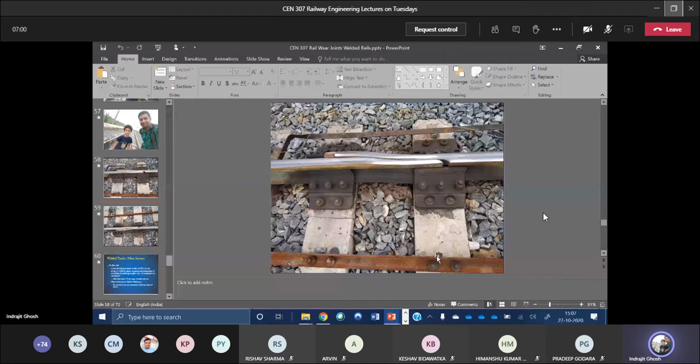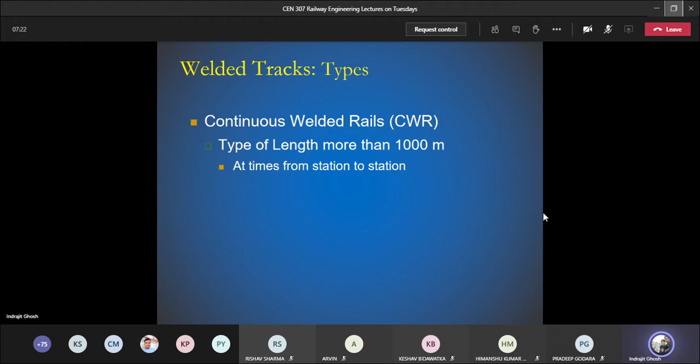Then we saw something known as long welded rails. In case of Indian Railway, long welded rail ranges greater than 250 meters in case of broad gauge and 500 meters in case of meter gauge. And we saw something known as continuous welded rail, where the length of the rail is more than 1 kilometer, sometimes extending from one station to another.

Then we saw some specific scientific terms related to long welded rail. If you look at the whole stretch of the long welded rails, at the end portion we have something known as breathing length. Breathing length is the portion where the rail extends or contracts.

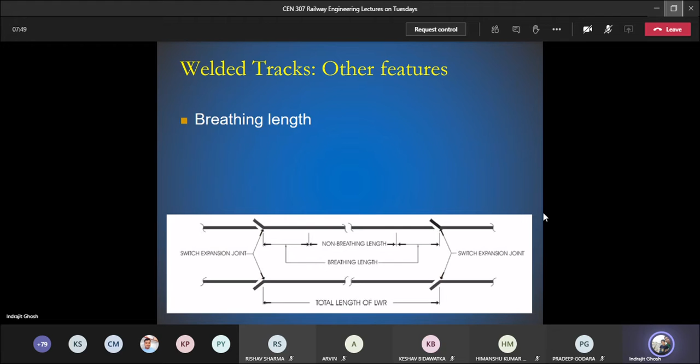There is some portion in the middle, shown here, known as non-breathing length. The manufacturing or rolling process is such that there will not be any contraction or expansion in the middle portion. This is the non-breathing length, and the portions at the sides, which I marked here, are the breathing length. Here we have something equivalent to the joint.

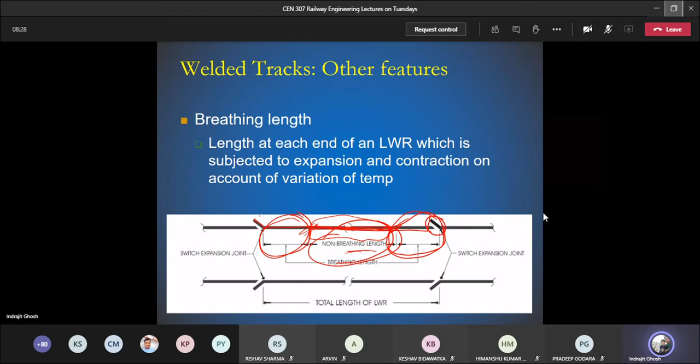We call them switch expansion joints. We have seen some photos. Here is one rail, here is another rail, with some special kind of mechanism. Here is a gap, here is another gap, and you can see this rail does not have the same cross section as earlier, and here also we do not have the same cross section.

I have shown you some photos from a railway track I visited with my son, showing some kind of special fastening systems. These are close-up photos. Here you can see we have kept a gap for the expansion and contraction of this particular portion.

Similarly, we have space on the other side. So the length of the long welded rail for this particular rail goes up to this point, and for this rail, it goes up to this point. There are nuts and bolts here.

There are some different kinds of devices that we have used here. This is a concrete sleeper; the photo I showed earlier was a wooden sleeper. As you can see, there are gaps for expansion and contraction, since we expect the rails will be expanding or contracting.

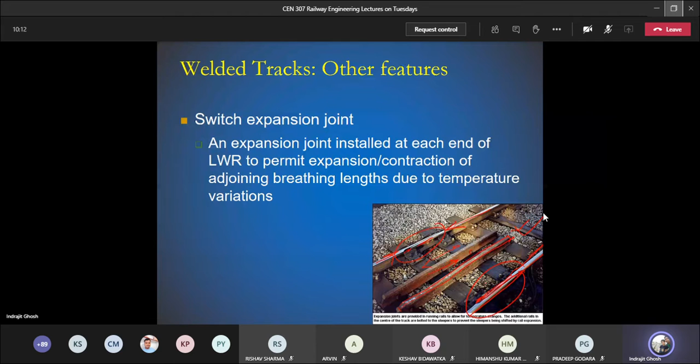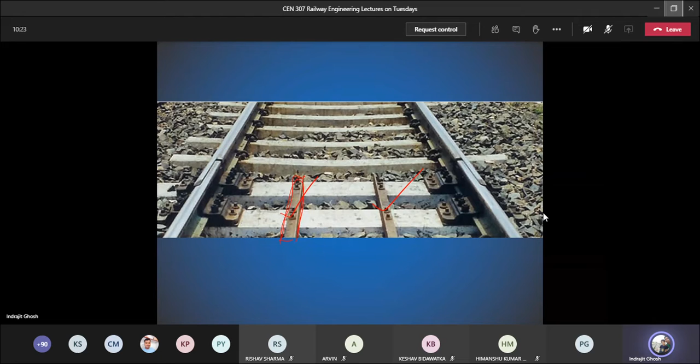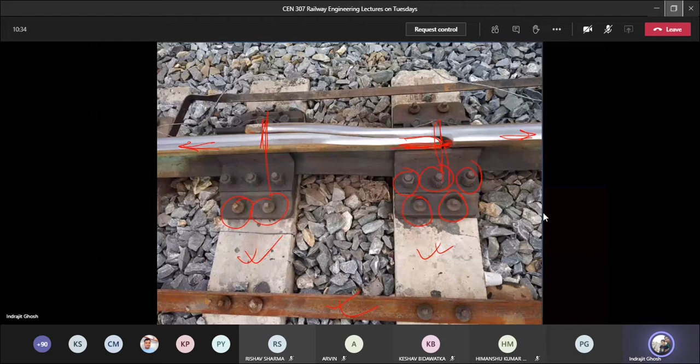So in order to have more stability of the sleeper, so it does not move along with the rail, we use some shorter rails to fix the sleeper with certain devices to maintain stability. Here also you can see we do not have rail but some kind of metal component fixing the sleeper for more stability. Here it is not rail but a metal part which has been fixed. Here also the same thing - this is the other side of the fastening.

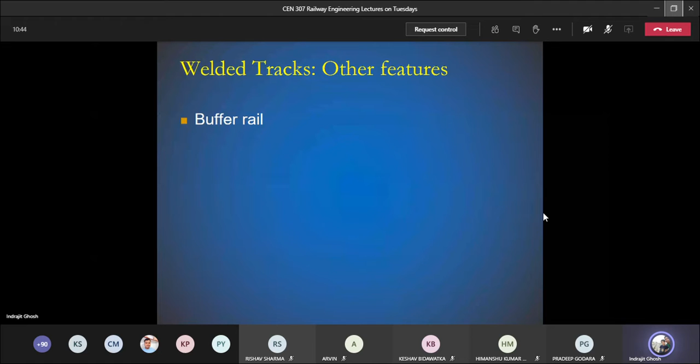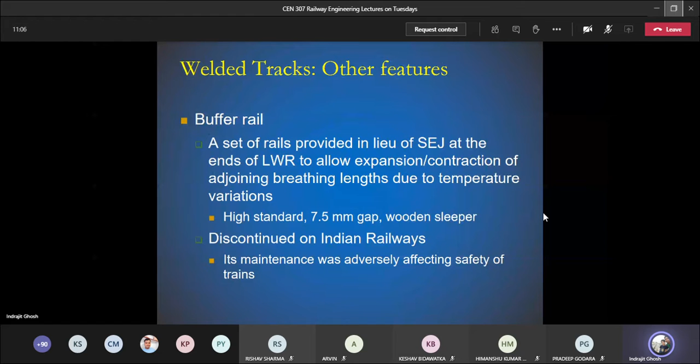Then we also talked about something known as buffer rail. These are special kinds of rails we have seen earlier, but nowadays we do not use them. The main issue is maintenance. When we replaced the traditional joint with buffer rails, we saw that the maintenance cost did not reduce significantly, so this is discontinued for Indian Railway tracks.

We also talked about the locations where we should not use long welded rail, such as new construction or where a line is being doubled, because earlier there was a single line.

So we do not use long welded rail until and unless there is mechanical compaction of the earthwork. The reason is that when you go for manual compaction, over time there will be some sort of sinking. And you can understand when you have a 250-meter long rail and some portion of the land is sinking, there will be a problem. There will be problems in the alignment and in the cross level. So until and unless we go for mechanical compaction of the earth, we do not recommend installation of the long welded rail. So approval of the chief engineer is required.

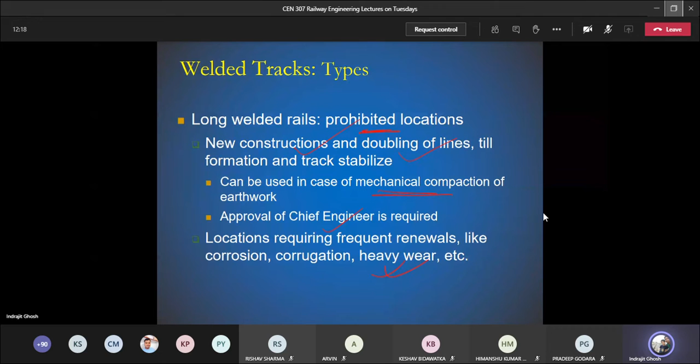Then there are some other special locations where we should not install long welded rail: yielding surfaces, soil susceptible to pumping, heavy contamination of the ballast where you have to replace the ballast and do the screening. We do not go for long welded rail there. You have to remember that long welded rail has substantial length. It is not that you have one single rail length of 12 to 13 meters that you simply remove, then remove the sleeper, clean the ballast and put the rail back. No, it is not that easy with long welded rail. More than 200 meters, approximately 250 meters, less than 1 kilometer, it is very tough to do.

So we do not recommend installation of long welded rail at certain locations, and where we have frequent floods, subsidence, or sinking of land, there also we do not go for long welded rails.

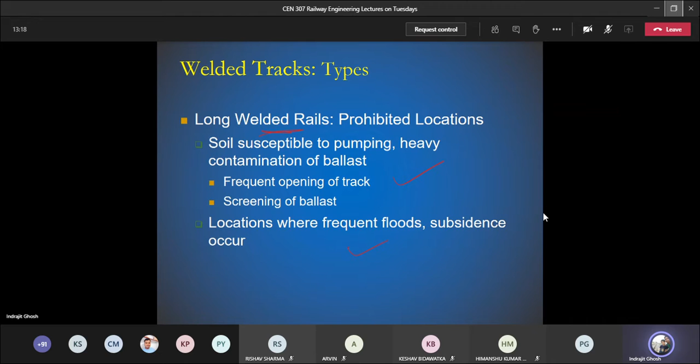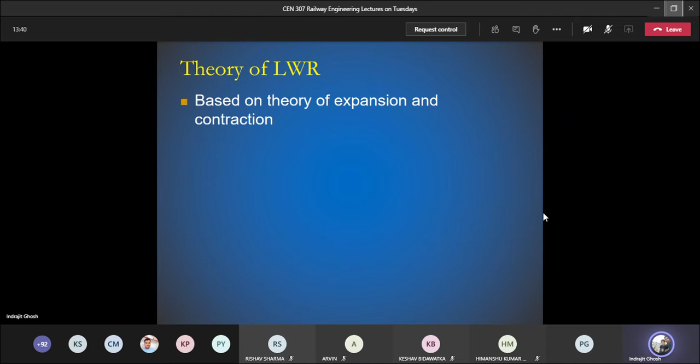Now there is one numerical that we have to solve, related to the theory of LWR, long welded rails. This is based upon the theory of expansion and contraction. We have seen that the switch expansion joint is set up so that there is provision for the rail getting elongated or contracted. So the expansion we observe in a track member, the rail, is a function of different parameters. One is the coefficient of linear expansion of the rail material, the material used to roll the rail. The second is the length of rail. And the third is the temperature variation, the range of temperature a particular railway section is exposed to.

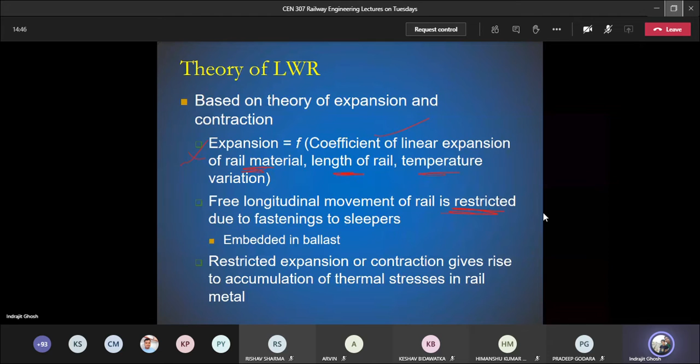Now, when we are using a switch expansion joint, we use nuts and bolts or other devices to fix the rail to the sleeper. We even put some sort of metal bar in the middle so that the sleepers do not move and the alignment is maintained. Obviously, we are restricting the movement of the rail, and the whole track is embedded in the ballast. It has been observed that this restriction imposed on the rail gives rise to some stresses. That stress is thermal stress, because everything is happening due to temperature variation, which could be due to the temperature at the site, or even due to dynamic loading.

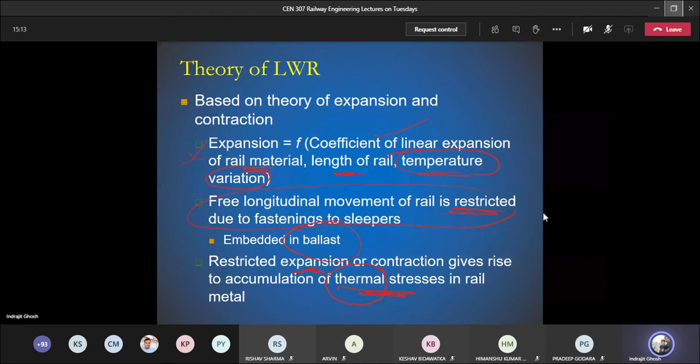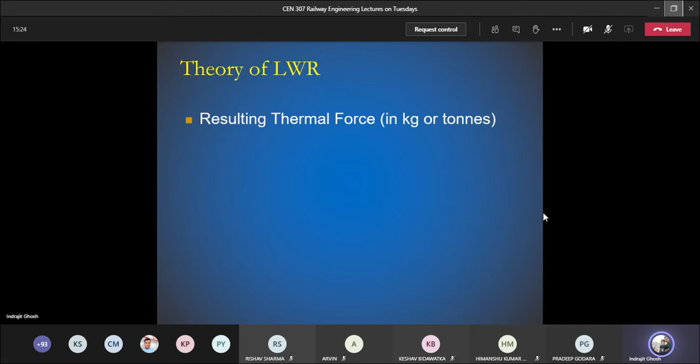So stresses will be developed. What kind of stresses? Thermal stresses. So there will be thermal forces, which we represent in kg or tons. There is a small formula where P stands for the thermal force, and there is alpha, T, E and A. Alpha is the coefficient of thermal expansion, which is a material property. T is the temperature rise above the rail laying temperature. A is the cross-sectional area of the rail section. For a 52 kg rail, as one example, the cross-sectional area is 66.15 square centimeters. For 60 kg rail, 90 R, 75 R, 50 R rail, the cross-section will change. It is not uniform across all rail sections.

Then one more property included in the formula is the elastic modulus, or modulus of elasticity, of the rail steel. So this is a property of the rail steel, this is the rail section, so everywhere we are talking about rails. And lastly, there is one more formula, 31.5 ST. S is the sectional weight in kg per meter, like 52 kg per meter or 60 kg per meter, or for the problem you solved related to 90 R, you will be able to tell how many kg per meter.

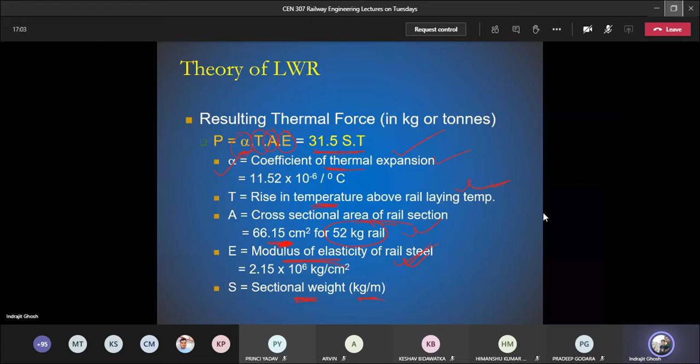So this is the formula. So we will solve a problem. There is one more small equation that you people have to remember, which is cumulative value of expansion and contraction. So what is the amount of expansion or contraction that we will be expecting at a particular location?

Now, whenever we are saying a location, obviously we are talking about LWR, and you know the middle portion of the LWR or the non-breathing length of the LWR does not expand or contract. So only it is related to the breathing length. So that's why it is written that cumulative value of expansion and contraction at the breathing length. Here L is the length of breathing length, and alpha T we have seen in the previous slide. So alpha is coefficient of thermal expansion, which is property of the rail, and T is the temperature variation.

Okay, in case of broad gauge on Indian Railway, breathing length is taken 100 meter on one side of the BG track. So 100 meter on one side, 100 meter on the other side. In the middle there will be some portion where it is not expanding or contracting, non-breathing length. So based upon your understanding so far, you have seen that when I have shown a slide on LWR, I said length of LWR is minimum of 250 meter.

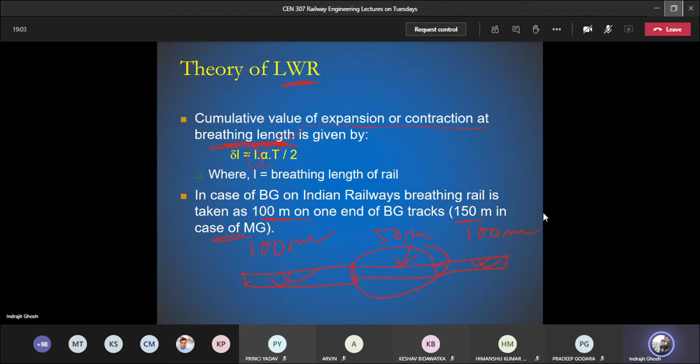Okay, now when I say breathing length is 100 meter on each end, so 100 meter, minimum 50 meter in the middle. Okay. So breathing length, non-breathing length. This is one long welded rail section. Okay. In case of meter gauge, it is 150 meter on each side. So 150 meter on the extreme right, 150 meter on the left hand side. In the middle, you have non-breathing length.

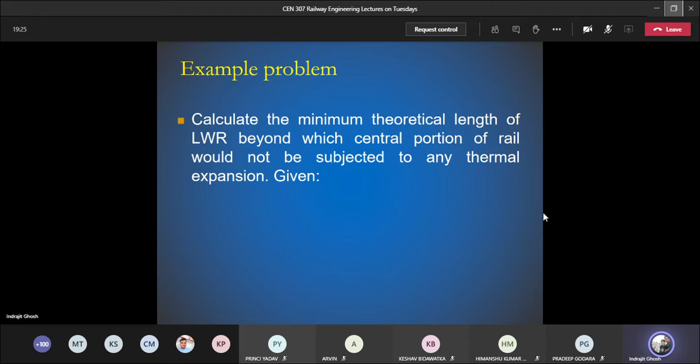Example problem. Calculate the minimum theoretical length of LWR beyond which central portion of the rail would not be subjected to any thermal expansion. So minimum theoretical length, and then we have been given certain data. So it says coefficient of thermal expansion, variation in temperature, cross-sectional area, modulus of elasticity. Then it talks about something which is sleeper spacing. You people know what does it mean by sleeper spacing.

Sleeper spacing is represented either M plus x or xxxx per kilometer. Okay, when we had nuts and bolt kind of fittings, this was more popular. So M plus x means how many sleepers within one rail length. So 12 meter or 13 meter, how many within that rail length. And this one is 1660, 1680 sleepers per kilometer.

Okay, there is one more data which is given here. Average restraining force per sleeper per rail is 300 kg. So what is the force being exerted by the sleeper on the rail? Because we have fixed some kind of devices. Okay, so that's why there are stresses getting generated. So we know how to calculate the thermal force that will be generated because of this restriction imposed on the rail. So how to calculate it? Okay. So from the formula we have seen that it is P.

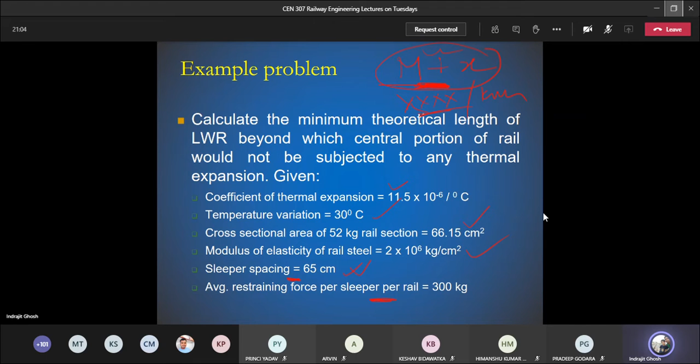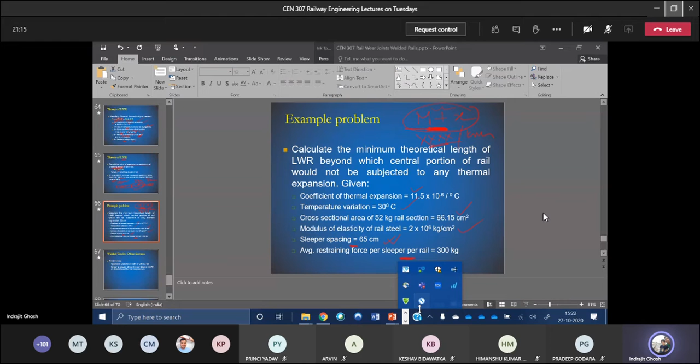So let me solve this. So all of you please solve it. Hopefully the whiteboard will come. Oh, how do I clean this?

How do I write? Okay, P is equal to, so we have seen a formula, alpha E A T. Okay, alpha value is given. Alpha is basically coefficient of thermal expansion or contraction, 11.5 multiplied by 10 to the power minus 6. This is alpha. E. E is given as modulus of elasticity, right? 2 into 10 to the power 6. You have to be careful about the units. Yeah.

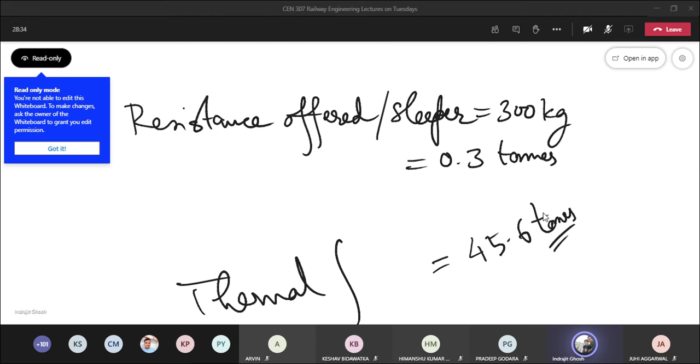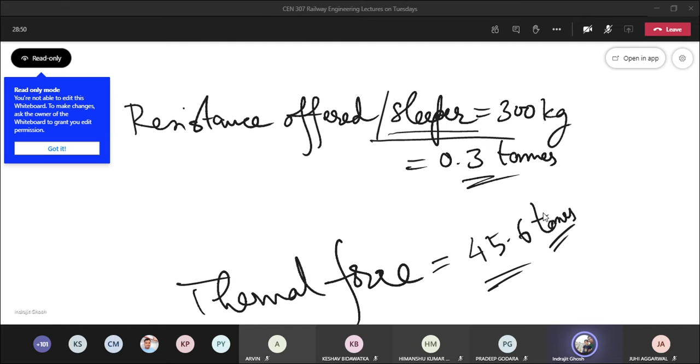This is the thermal force, which is 45.6 ton. This is resistance being offered per sleeper, which is 0.3 ton. So now we need to see what is the number of sleepers we required to restrain a force.

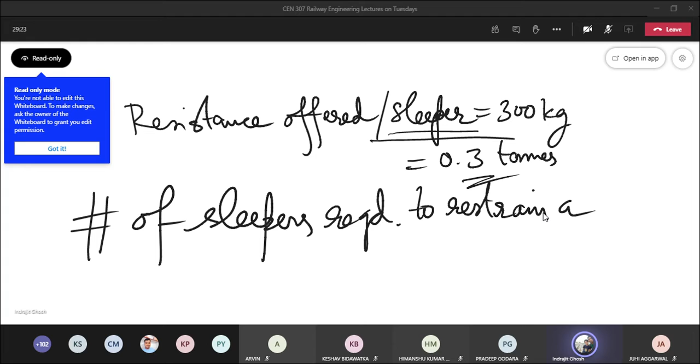How we will be getting it? We know it is 45.6 ton, which is being generated. This will give you the number of sleepers that we need. So as per my calculation, it is 152 sleepers.

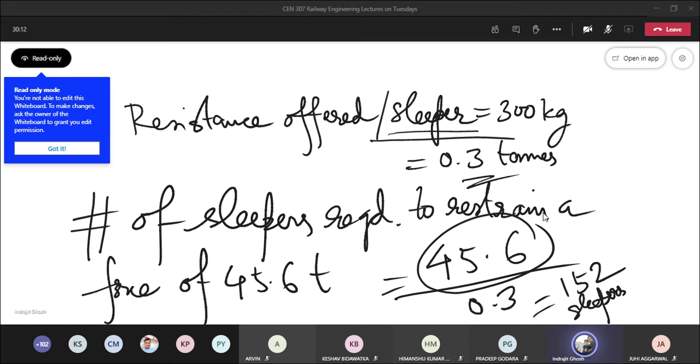This 152 sleepers, you have to remember that we are talking about breathing length. So when we say that at one end of the breathing length, at one end of the LWR, this much force is getting generated. This is the restraint that can be provided by one sleeper. This 152 sleepers is how many sleepers we need at each end of the LWR, or how many sleepers we need at one breathing length. Okay, in this case, this is 152.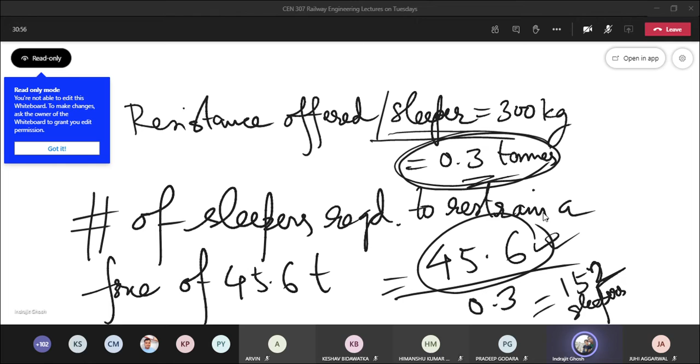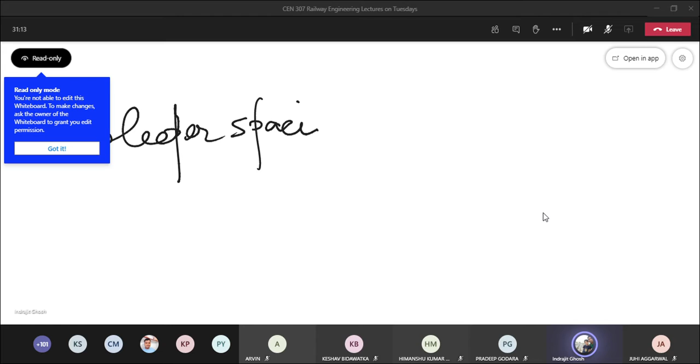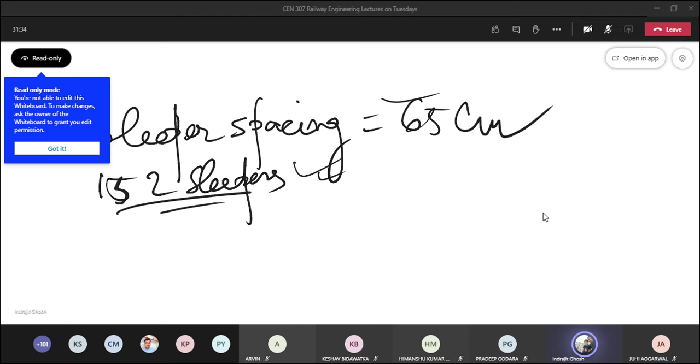So if breathing length is 152 sleepers and we know the sleeper spacing, sleeper spacing is given as 65 centimeter. How many sleepers we need? We understood it is 152 sleepers. So from these two, we get an idea of how much length we require to lay 152 sleepers, because we know the distance between two consecutive sleepers. So how much it is?

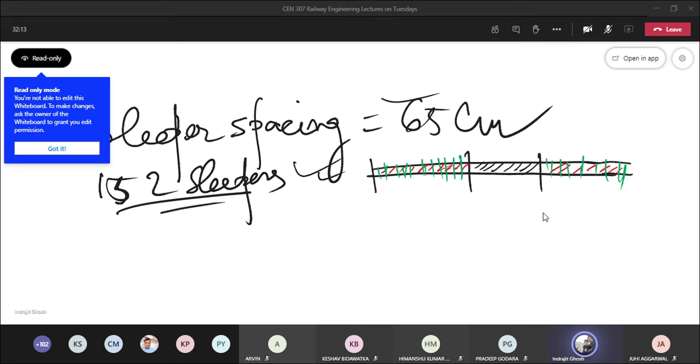So this is a long welded rail. We have non-breathing length. We have breathing length on this side and on the other side. We know 152 sleepers. We know the sleeper spacing. So if we know the sleeper spacing, we will be able to tell what is this length, the breathing length. Okay. So what is the breathing length? Anybody?

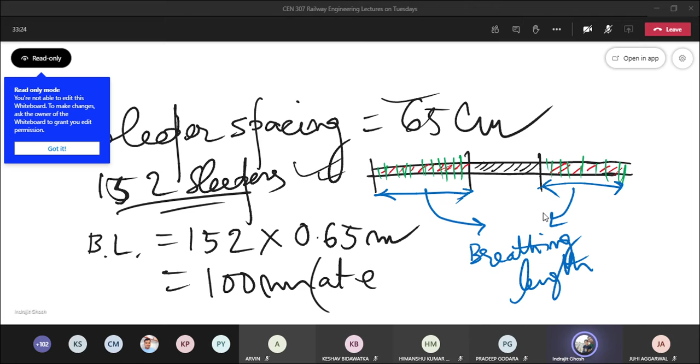Approximately. So shouldn't it be 151? Yes, ideally it should be, but try to see this photo. Just hold on. Yes, now, whether we are including this sleeper or not, right? So you are saying that if there are 3 sleepers, there are spacings for 2, right, Keerat? Yes, sir. So 152 sleepers means 151 spacings. Yeah.

So how much it is coming as per your calculation? I haven't multiplied it. I'll just do that. So it's 98.15 meters. With 151? Yes, sir. Okay. Yes, that is correct.

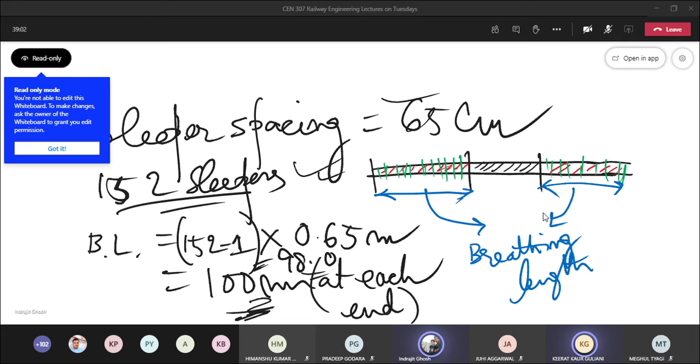Yes, sir. There is a term called destressing. So many a times we say that we are distressed. So that particular spelling is different. That is distress, D-I-S-T-R-E-S-S. But here you can see this is relieving the stresses that are getting generated in long welded rail or continuously welded rail. Okay. So destressing is done by doing something. What is that? This is not shown in this particular slide. Any idea how we'll be able to do it?

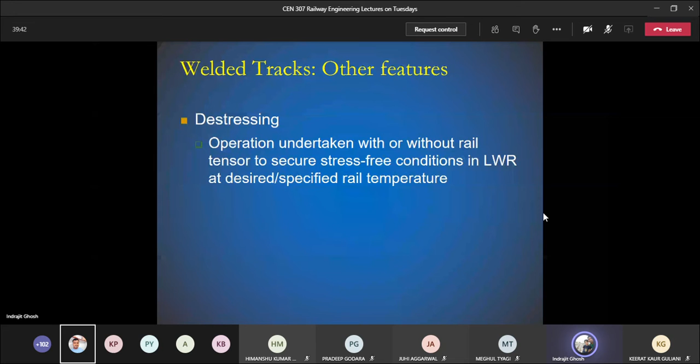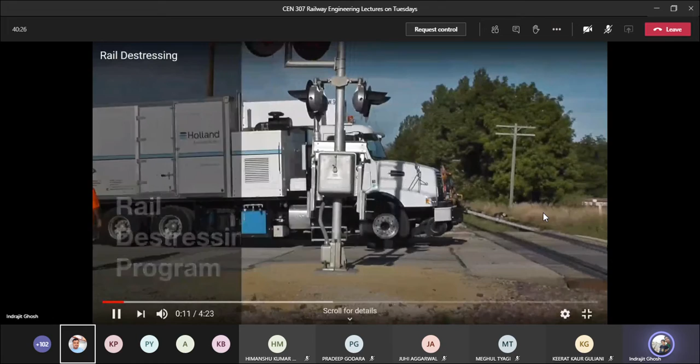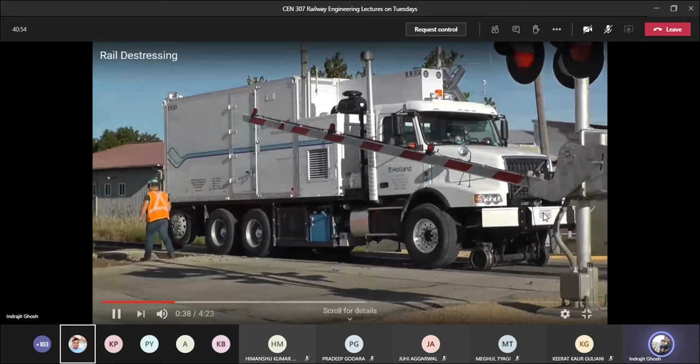Let us see a small video. You people can see my YouTube screen? Yes, sir. Okay. So heading: rail destressing. So they have a special truck. Now see how the truck is moving along the railway track. See here, some kind of setup which is similar to rail wheels.

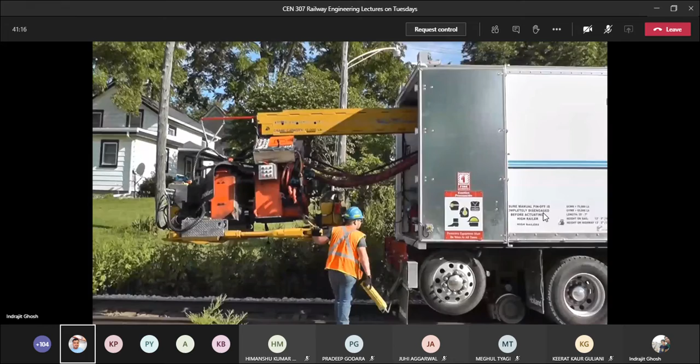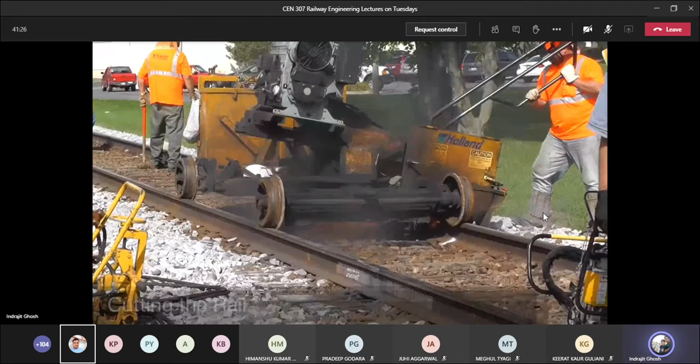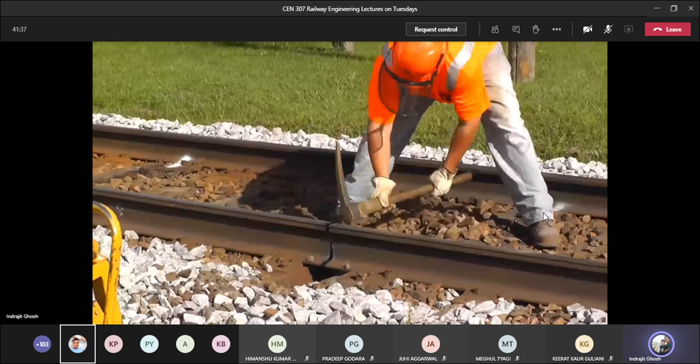What they are doing, they're simply cutting it. They're cutting the rail. Then once they cut the rail, what will they be doing? Finally, it is not shown here. What will they be doing, any guess? Welding. Welding, correct.

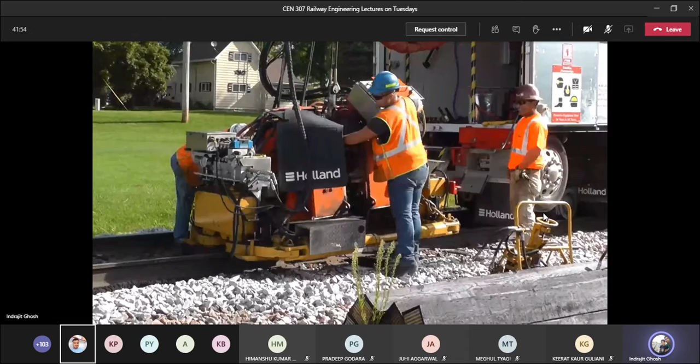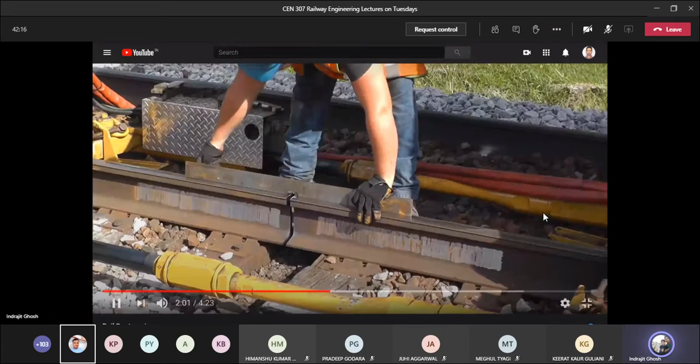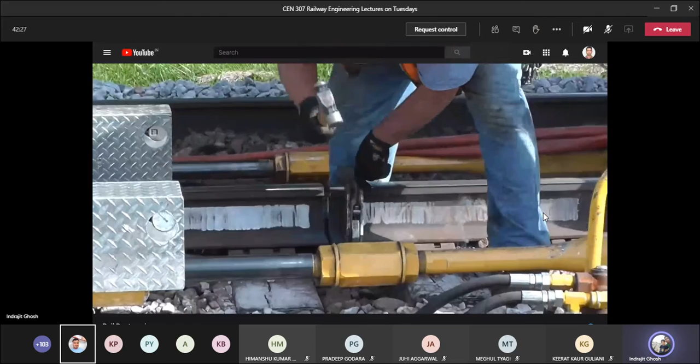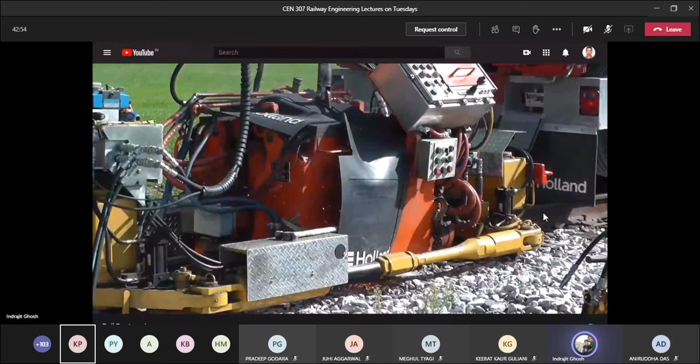See this device here. This is a hydraulically operated machine. So this is the mold that they use for the welding. Which welding method are they using? When they have a mold, they will put some powder. Thermite. Which is thermite. What are the powders? Ferric oxide and aluminium. Yes, then after the reaction, Fe will come out, Al2O3 will be remaining, and there will be a huge temperature rise.

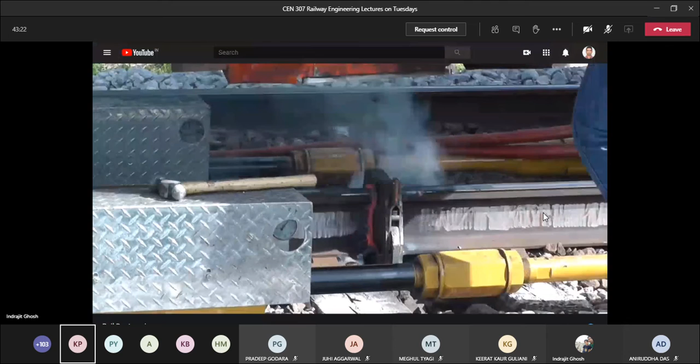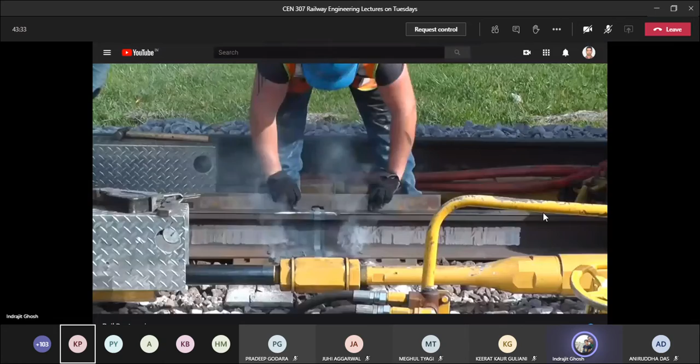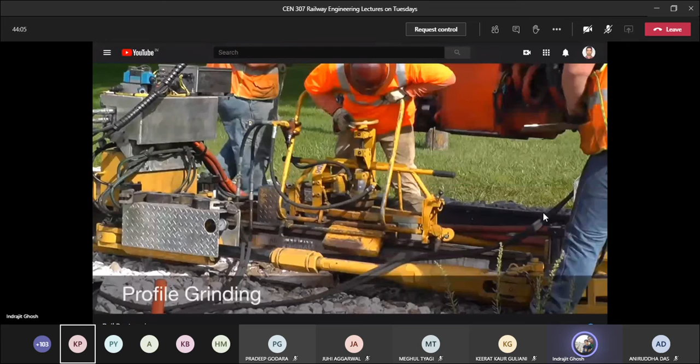They need to fix the cross level as well as the alignment. So rail anchor we have seen during the discussion of creeping. Smoothening of the rail surface. There is foreign metal, so we need to do some polishing.

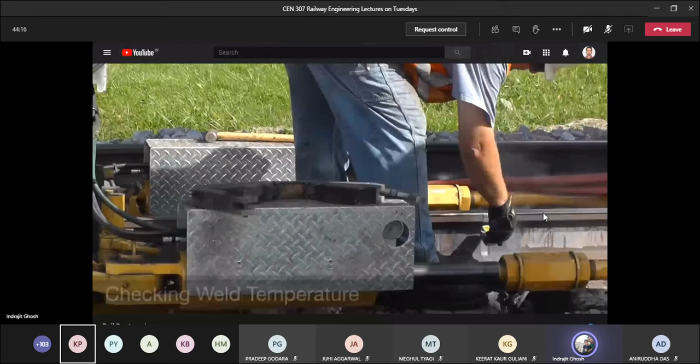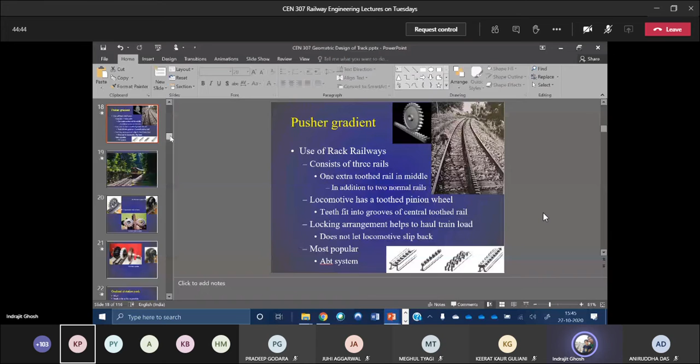Okay, so I have included the video link at the bottom portion of the slide, so people can see it later. Okay, so this is the end of the welded rail. Now I thought that I would be discussing fastening, but I saw that there are so many things to remember. I have postponed the discussion of fastening. Okay, and I will directly go to the geometric design component as you people are working on the course project.

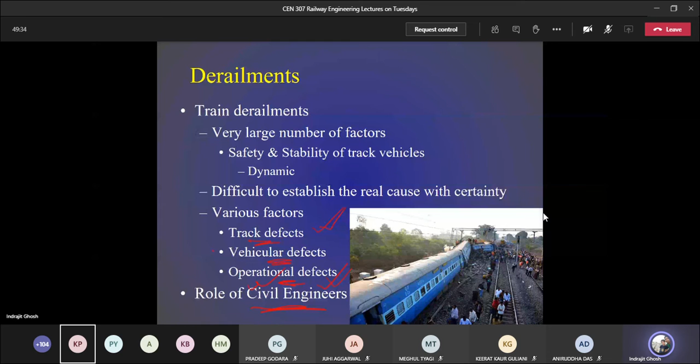Now when we say civil engineer, I know that this is the era of multidisciplinary things, so we should not only talk about civil engineers, but based upon the things that we learned during this class, we will be able to talk a little bit about the track defects and some sort of operational defects. What kind of signaling, what kind of interlocking we can do to make sure that there is no involvement of human error. And track defects, we need to see how we will make sure that all the track components are in shape.

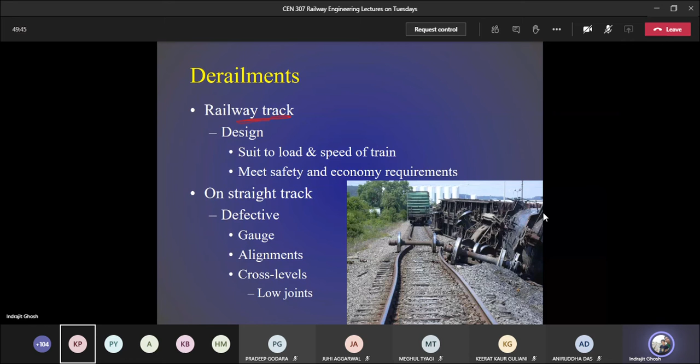So here is one more photo of train accidents. So railway track needs to be designed properly. First one is load of train. It is very unlikely that a train is not having any load because each wheel is having load. Then there are axles, wheelbase, coaches, compartments, bogies. So obviously there will be load. And at the same time, you do not expect that the train will be either not traveling or traveling with a very slow speed. It will be traveling with a high speed. So speed of the train also we need to put under consideration.

So we need to make sure that the train is safe. At the same time, it is efficient. At the same time, the economy is being maintained. We are not going for excessive expenditure. So we need to meet all the things. We need to optimize our problem. So what kind of problems do we see in case of derailment? There can be defects on the straight track, on the curved track, at the points and crossing locations. So what are the different types of problems?

In case of straight track, there can be elongation of gauge. So instead of 1.676 meter, we saw that it is 1.680 meter. So there will be a problem. The alignment can be an issue. So you can see up to this portion, the train line was going like this. Here also it is going like this. The line should come as per the dotted line, but here there is a bend. So the alignment has changed. It could be related to derailment. It could be related to the thermal stresses that are getting generated because of the presence of the joint, switch expansion joint or normal joint.

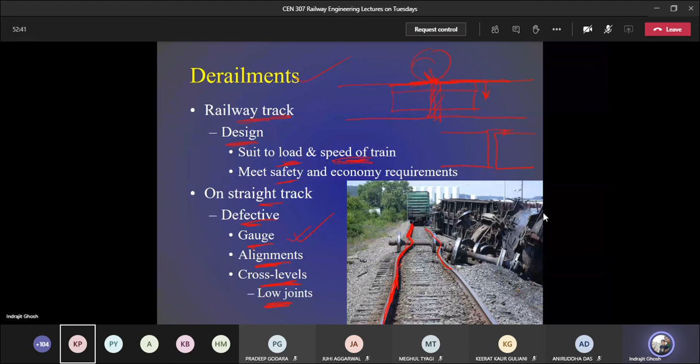So in curved track, there are some unique features. First one is related to super elevation, second is related to the radius of the curve, whether it's a really sharp curve or a really large curve, whether the curve has been designed properly. And when negotiating a curve, what speed is the driver maintaining? Whether there's a particular speed beyond which it becomes unsafe.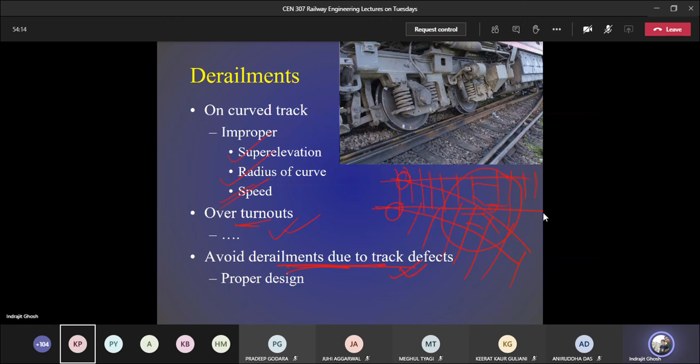So those are the things we discuss to make sure there is no accident involving trains. So how to avoid these accidents or derailments related to track defects? We are not talking about vehicular defects, we are not talking about operational defects. Rather, we are only talking about track defects. How to get rid of that? If we can go for proper designing of the track.

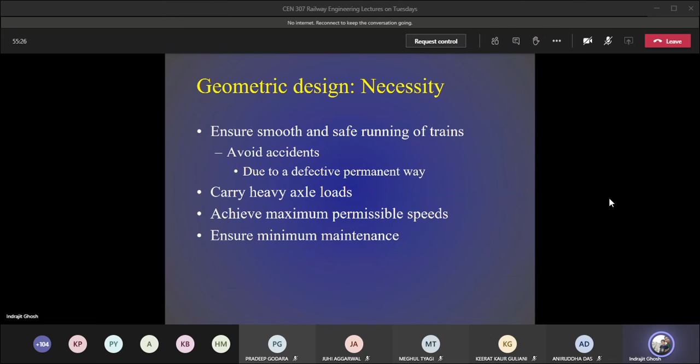Arises, the train will be able to move at maximum permissible speed. For that, we need to make sure that the geometric design is done in a proper manner.

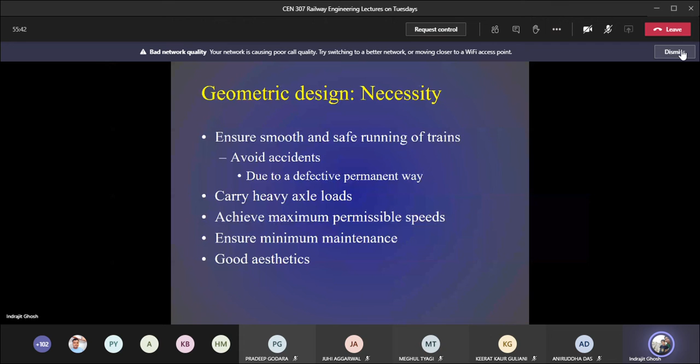Last one is ensure minimum maintenance. So why are we talking about minimum maintenance? In that way we can cut our budget, we can cut the cost. We do not need to send laborers for screening, for fixing, for tightening the things.

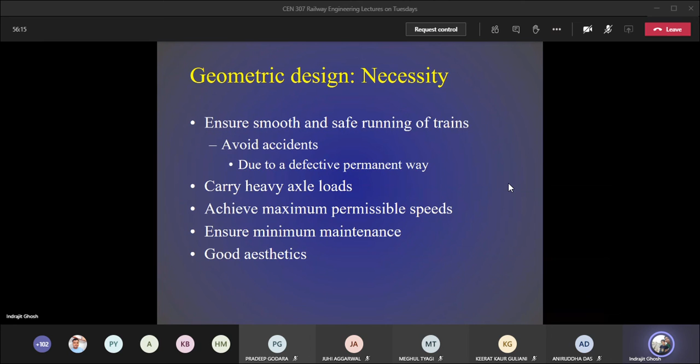The last one is good aesthetics. It does not look good otherwise. So it is not related to engineering, but there are people who bother about how the view looks, how it appears. So we need to make sure that the geometric design also provides good aesthetics.

So there are various elements we talk about in case of geometric design. This could be related to your project presentation, like the question of what things we should include. It can be related to anything which affects track geometry. So the first element is gradient. There are various kinds of gradient we'll see in the next class, but they can be broadly classified into two categories: upward gradient and downward gradient, known as rising and falling gradient.

In case of highway and traffic engineering, you people heard about grade compensation. Here also we have grade compensation. Anybody remember where we went for grade compensation? In case of highway and traffic engineering, where did we compensate the gradient? Anybody remember?

We had something known as ruling gradient, with which we design. That depends upon many things, engine power, and so on. So we said that ruling gradient is the maximum gradient, though there can be extraordinary cases. But there are certain locations where we need to go for compensating the grade. In other words, we cannot provide that much gradient. Where? Anybody remember? Sharp curves. Yes, sharp curves, correct, you remember it.

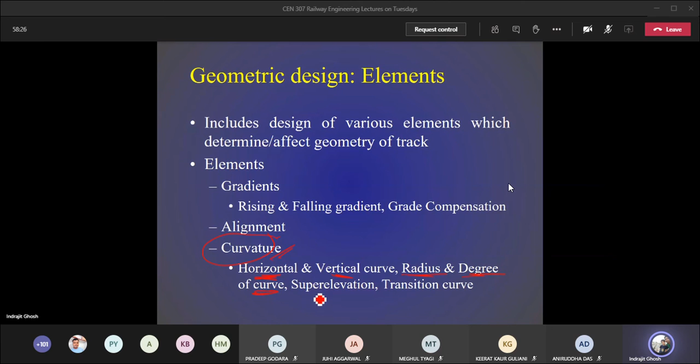Then we have the alignment, and the last one is the curvature. When we talk about this in highway and traffic engineering, we need to talk about super elevation. How do we go for designing super elevation? And the last one is transition curve.

So you have a straight track, and you have a horizontal curve earlier. You cannot directly join them because here you have a radius of infinity, and here you have a radius of, suppose, 300 meters. So the passenger and the driver will be feeling a jerk here. That's why we provide a smooth curve which joins the straight track to the horizontal circular curve present here. So this portion is known as the transition curve.

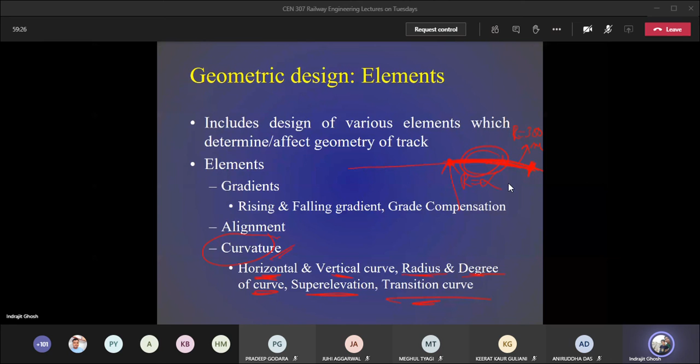So we had some formula based upon IRC, centrifugal acceleration, and other things. Okay, I think it is 4 already, so you people have to leave for the next class. We'll start our discussion and continue with it in the next class. So I'll share the slides of whatever we have discussed so far, and you people...